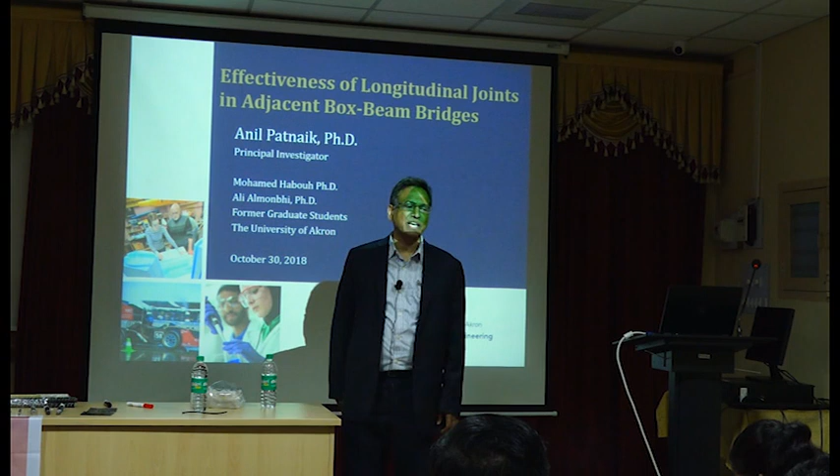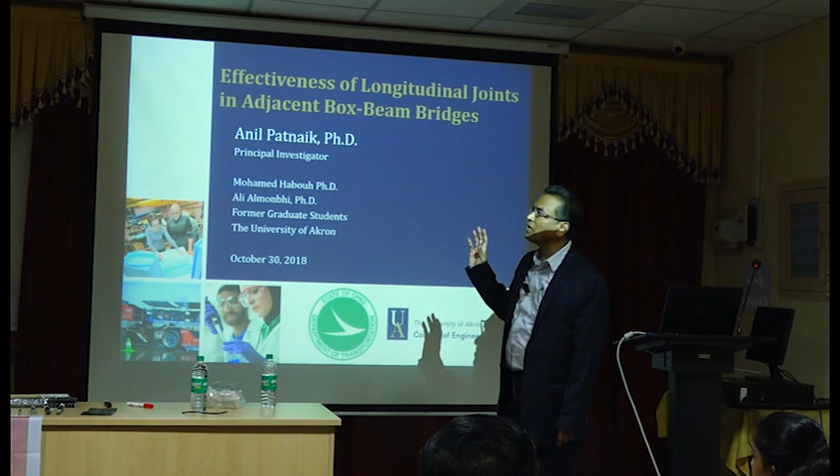These two co-authors are my students who finished PhDs on this project. So we are trying to find out, this research is on the effectiveness of longitudinal joints in adjacent box beams.

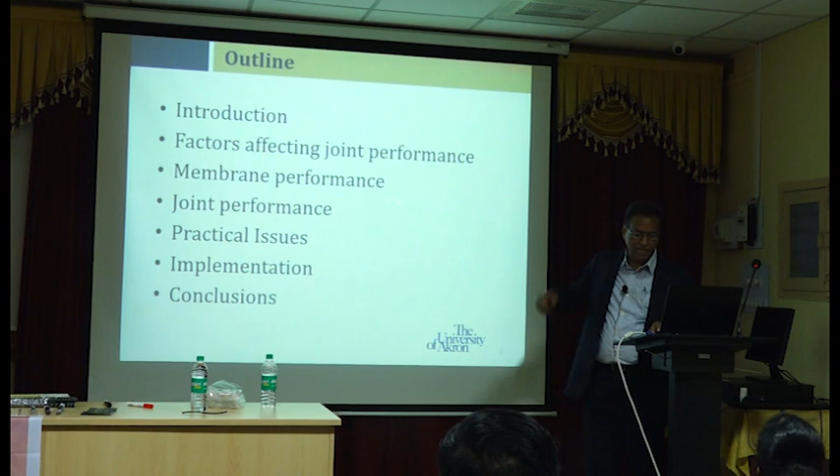I'll go over many things, or at least I will go over a few things and skip a few things. But what's a box beam bridge?

In the US, there are some standard spans. If you have two highways, one on this side, one on this side, with a little divider, the span is about 50-60 feet, which divided by 3 is about 20 meters. So 18 to 20 meters is a very standard bridge span.

Width is always about 12 meters. Almost always, you'll see 12 meters width in many cases.

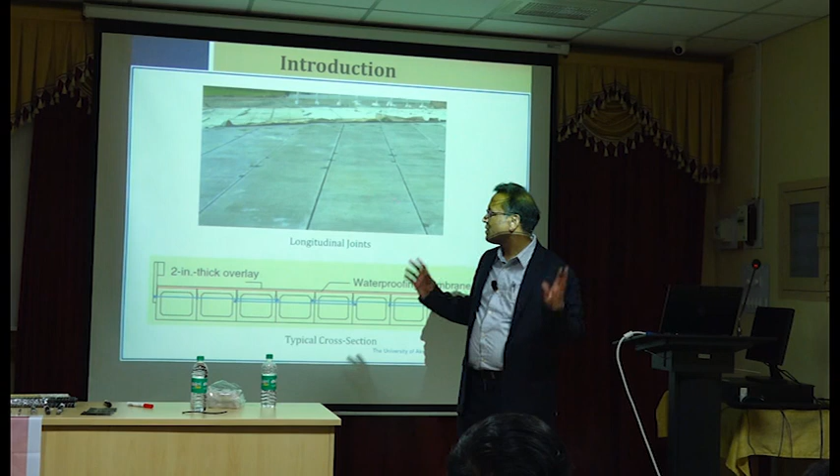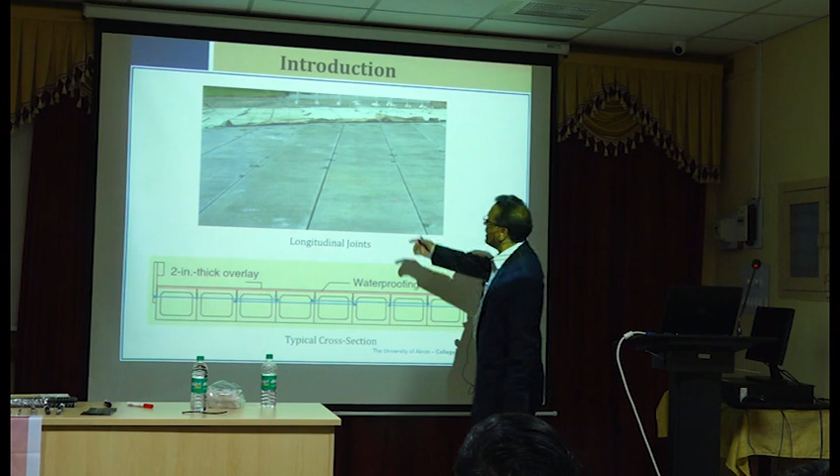So what they do is make precast box beams just like this. They make hundreds of them, bring them to the site, put them all together, and tie them 3 beams at a time. So they're all tied together, and there is a joint here.

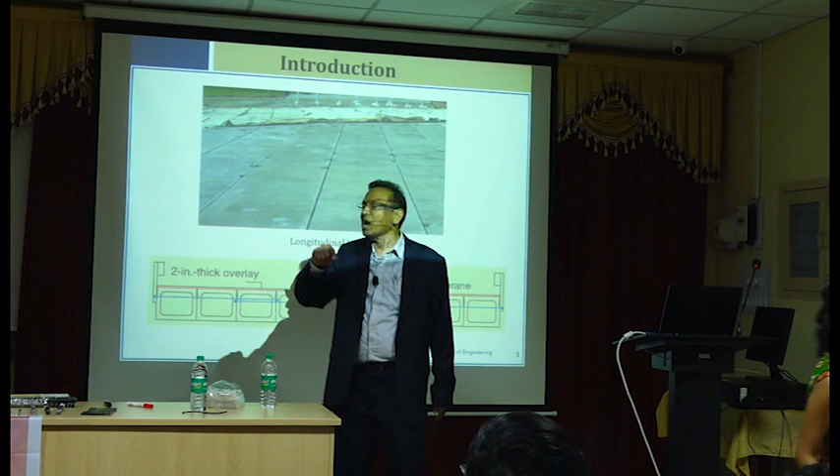So at each location there will be an annular space, and in that annular space they fill just grout. If you put grout, then the assumption is they will all work together.

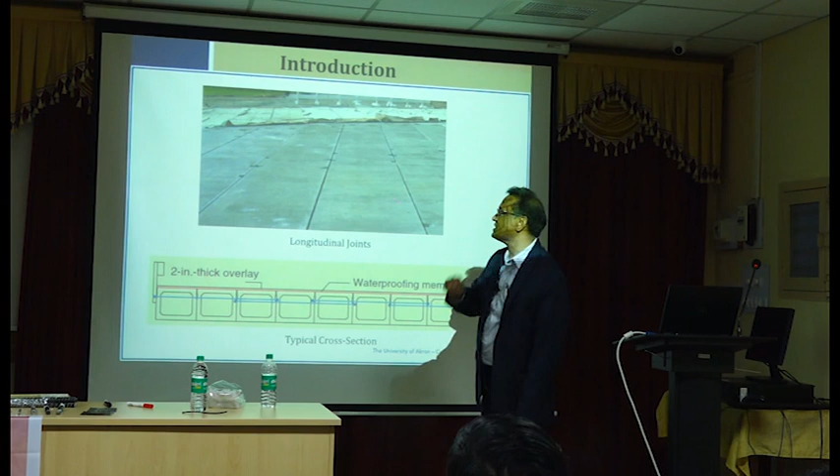So those of you familiar with highway bridge design, our standard width of an axle is about 6 feet. 6 feet is about 2 meters, actually less than 2 meters. So these beams are smaller than 2 meters.

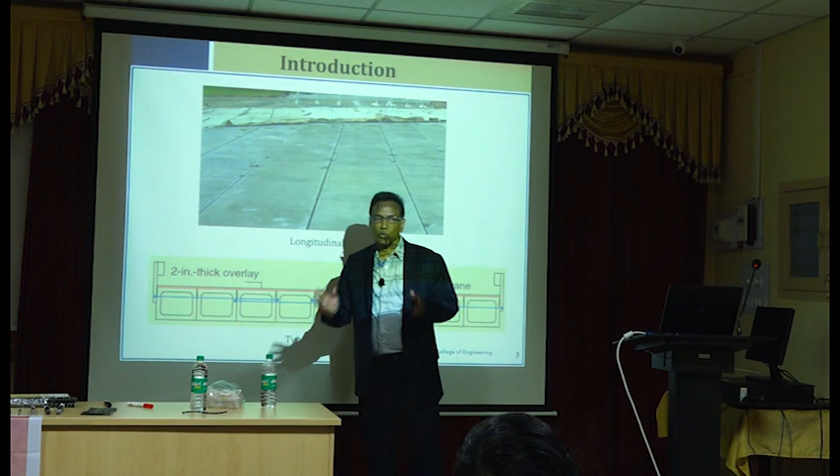So if all these beams are working together, you can assume some kind of load transfer over more than one box beam. That's the assumption, and that's the whole point of making this work together. If that happens, it's great. If it doesn't, then your boxes will be stressed too much. If you design for a smaller load assuming perfect interaction between adjacent beams, then it will become unsafe.

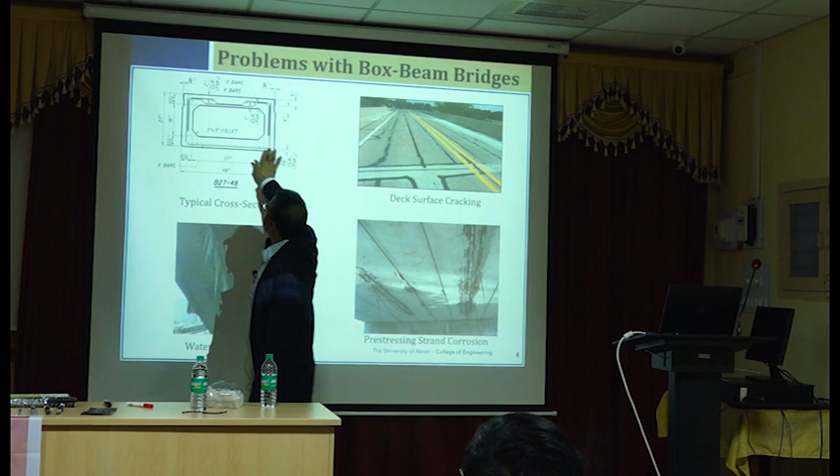So the typical details look something like this. You have a lot of strands, mostly pre-stressed strands, not post-tension but pre-tensioned prestressing strands. And they have very long casting beds.

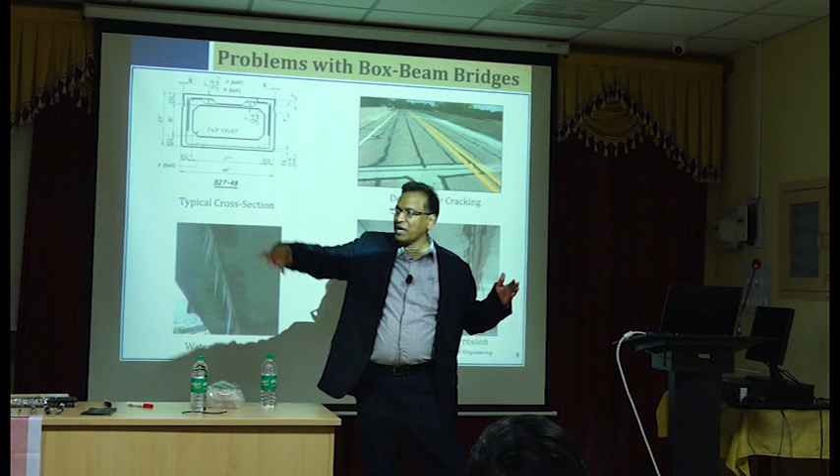Did any of you go to a pre-casting plant yet? If you have, or if you haven't, just go to something nearby. Generally they have 100 to 150 meter long beds, and they make these box beams in one long stretch.

So each bed you can make 10 beams, maybe 8 beams, depending on the span, and then they cut the strand in between to make smaller beams.

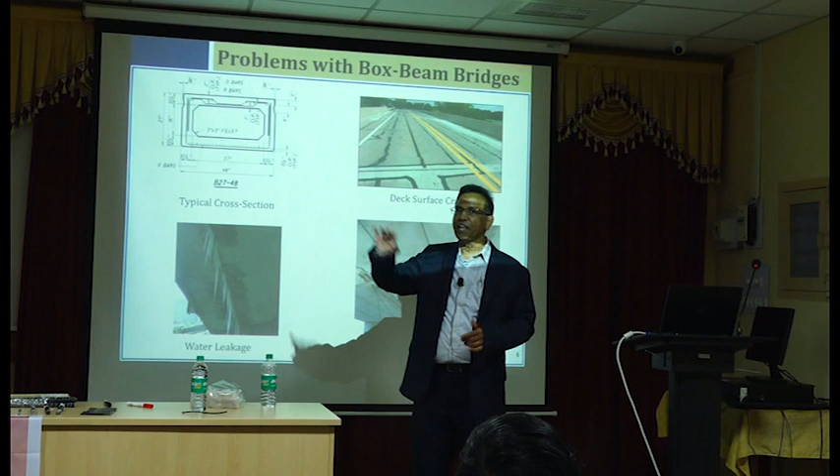In one day they can make 20 beams. That's how fast it is done. You place the concrete, let it set, then cut the strands and remove it from the formwork. You remove that in less than 15 hours, 12-15 hours, and then they make preparation for the next set of beams. So it's a very fast process.

Each beam is less than $20,000, very little money. So these beams are very inexpensive to make.

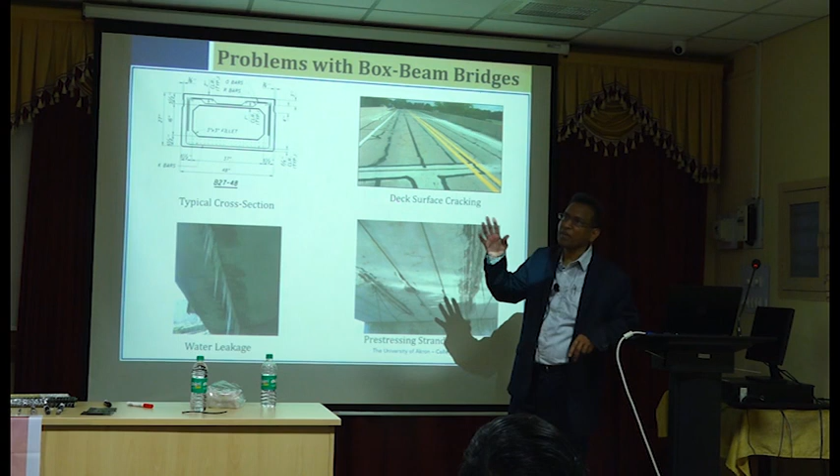So there are at least 20,000 of this kind of beams in just one state. This kind of bridges, each bridge will have 8 or 10 boxes. So it's a very common thing.

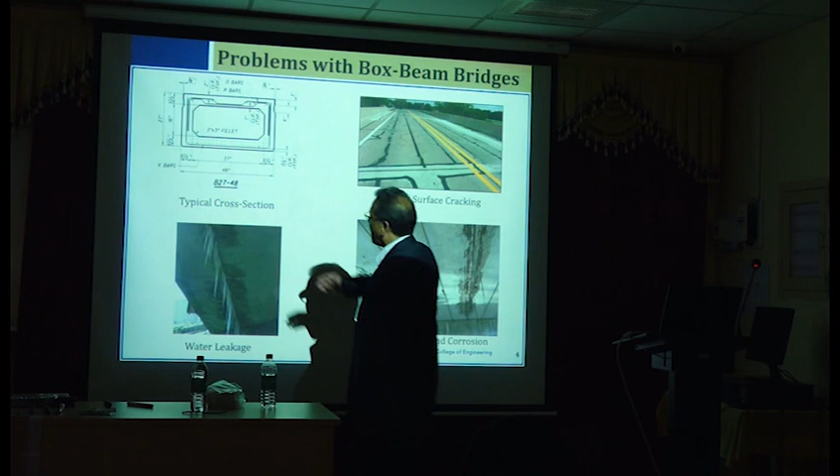But the whole problem is these joints tend to leak. You can see how these icicles are formed. Can you turn off the front light just for 1 minute? Yeah, just for 1 minute. So you can see how the water seeps through here, and because it's very cold, it becomes icicles like that.

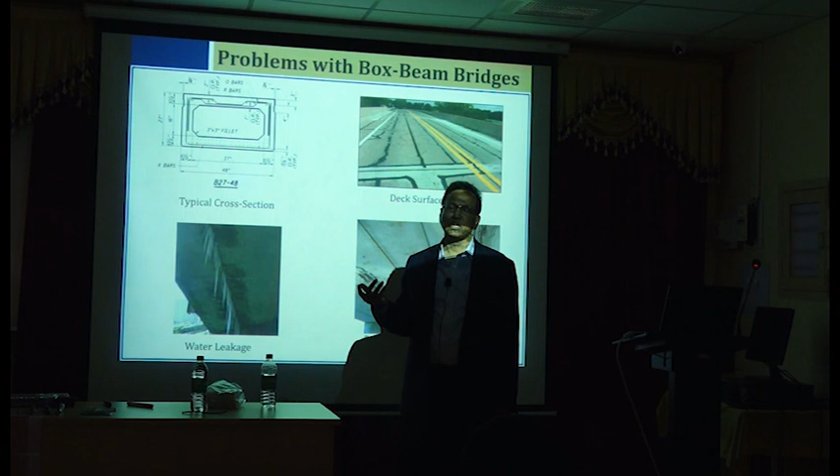So that's ice. And to keep the ice from becoming hard, they spray a lot of salt chemicals. Nowadays the people who maintain the roads don't care about structural performance, so they put very aggressive salts, a 30% salt solution, which is like a very strong brine solution.

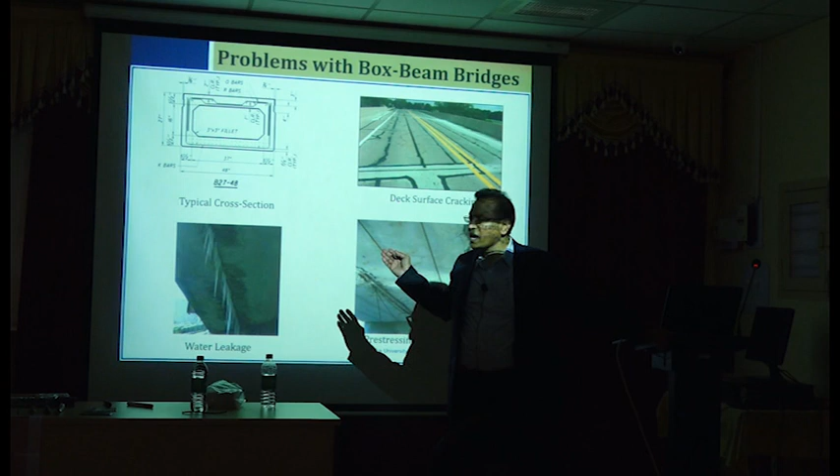They spray that high concentration salt solution on it, and that's what causes corrosion. All these strands break, not all, but many of them, and they start falling down onto the road below the bridge. So it's a real problem.

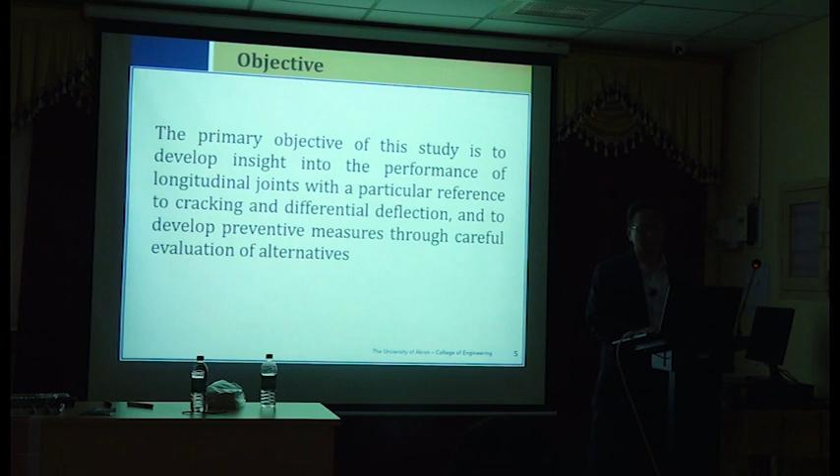In this project, we were given the task to improve the performance of this kind of box beams. So we looked at three aspects: membrane performance. I think I'll go back a minute and explain what it is.

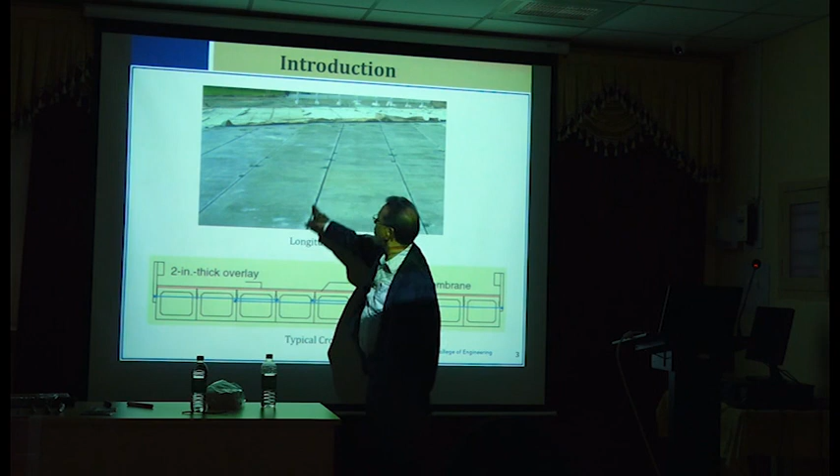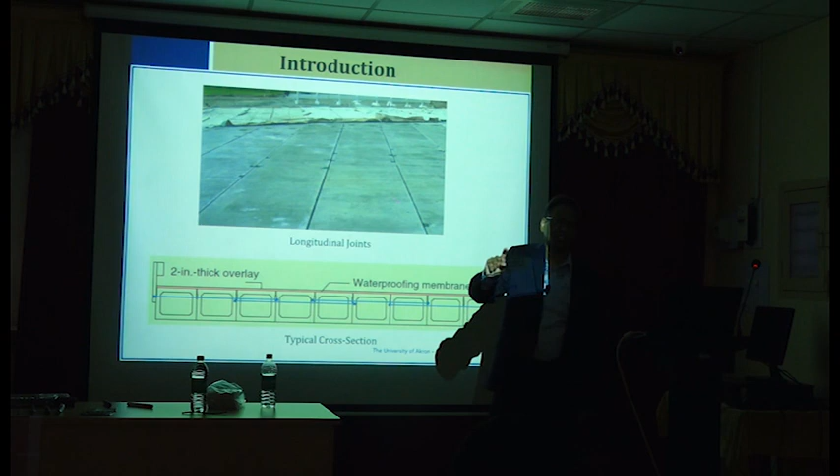So once you place these box beams side by side, you grout the joints, then you put a waterproofing membrane on top, and then on top of that you put a 50 millimeter asphalt wearing course, a 2-inch wearing course. So first you have the box beams, then the membrane, then the asphalt wearing course.

Very quickly you see that within a matter of weeks, these box beams crack at the joint. That's a big problem in many parts of the United States, so they are willing to invest a lot of money to do research, and they asked me to do some work on that to improve the performance.

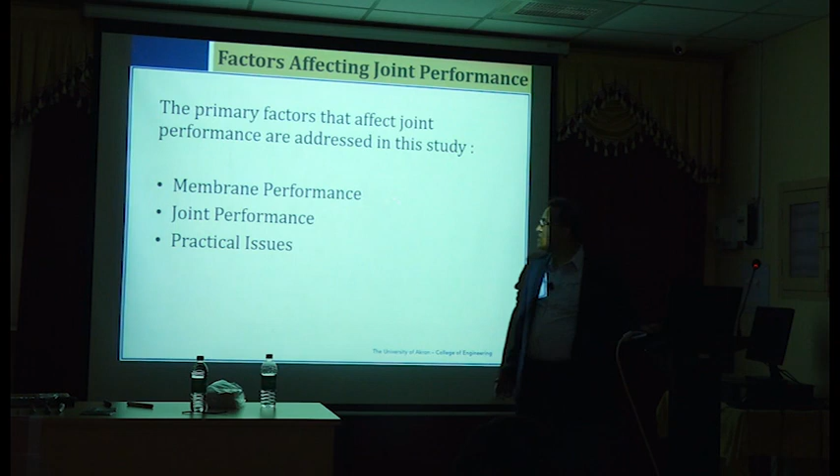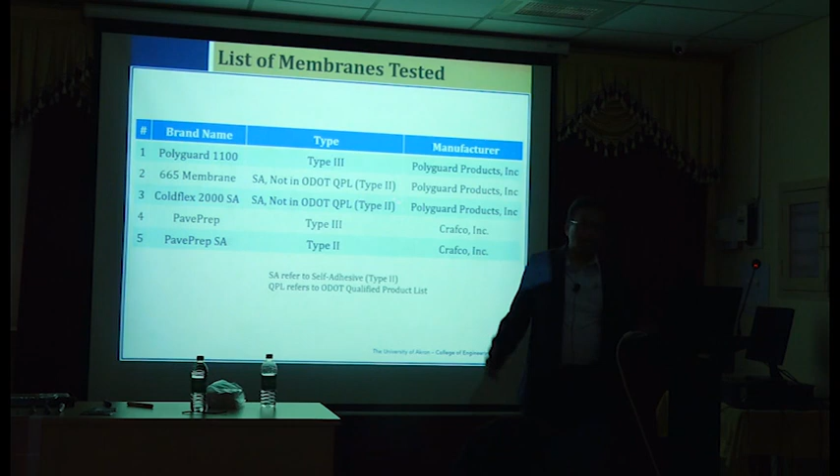So we looked at membrane performance. This may not be very interesting to you, this part. We looked at various different aspects of membranes, we picked a lot of membranes. I'll go fast because we don't have much time. But we did a lot of tensile tests, peel-out tests, shear tests and so on, and then we did waterproofing tests, everything.

What we found was everyone thought the membrane is not working, that's the reason there is leakage in the joints. But we found that the membranes are perfect. They are not really causing any problem in terms of water leakage.

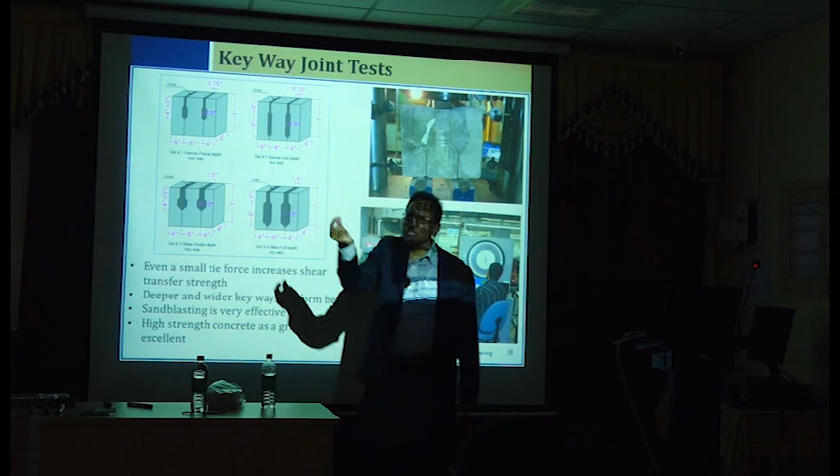Then we started looking at the joints. The joints look something like this. The standard joint is a very small joint, 3/4 of an inch, meaning a 20 millimeter opening. You place your grout through that opening, and there's about a 40 millimeter width below the top surface. So you place your grout through that, and then once you place the grout, you think it's okay, it's working.

And then we tried different types of geometries for the keyway. Keyway means the joint geometry.

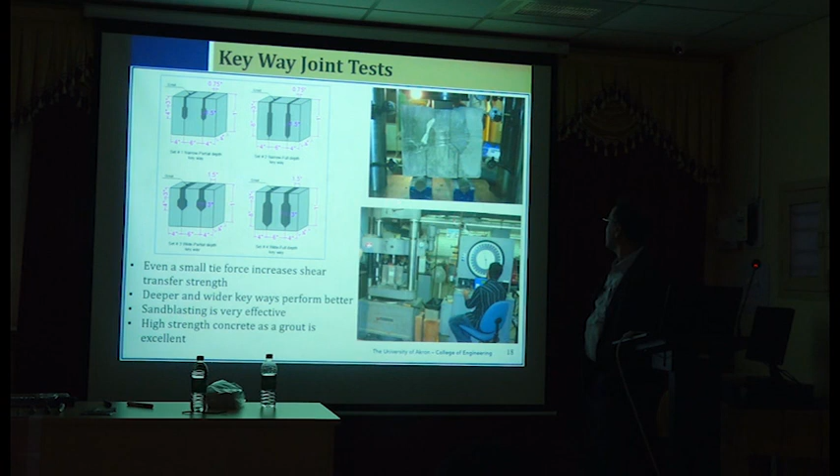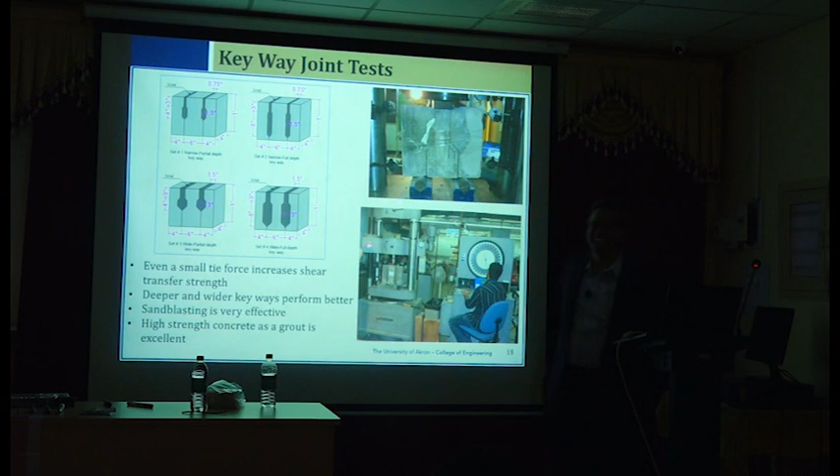I think this is one of our students who Jagdish knows. I think that's Srikant, that's Srikant. So tell him we are all in the class, they looked at your picture, and just tell him he looks very handsome. He is handsome anyway.

So we have so many different kinds. Then we did a lot of beams with very long spans, and we actually tested these joints.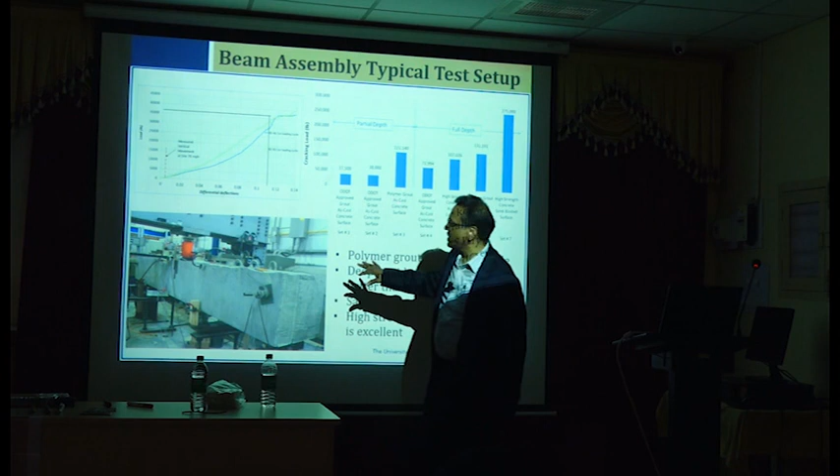I will go a little bit quick because that's what we will need to finish these presentations within the 2 hour time slot. So we tested about 25 feet, let's say about... up to 10 meter length beams we were able to test, and we tested almost all of those at full scale.

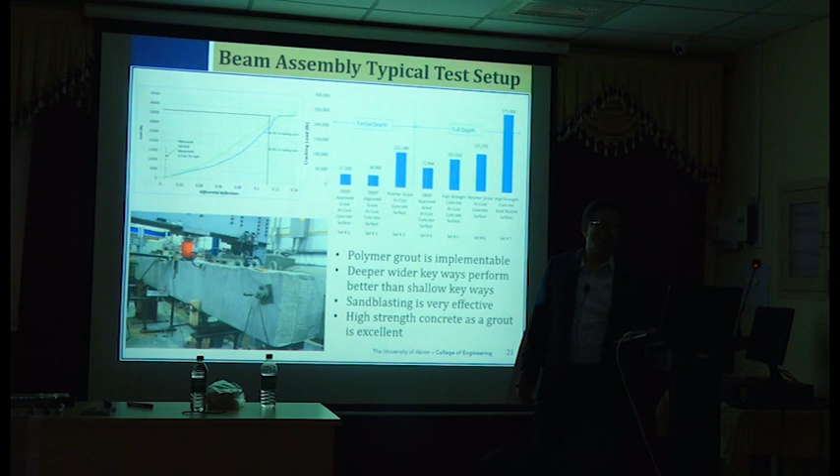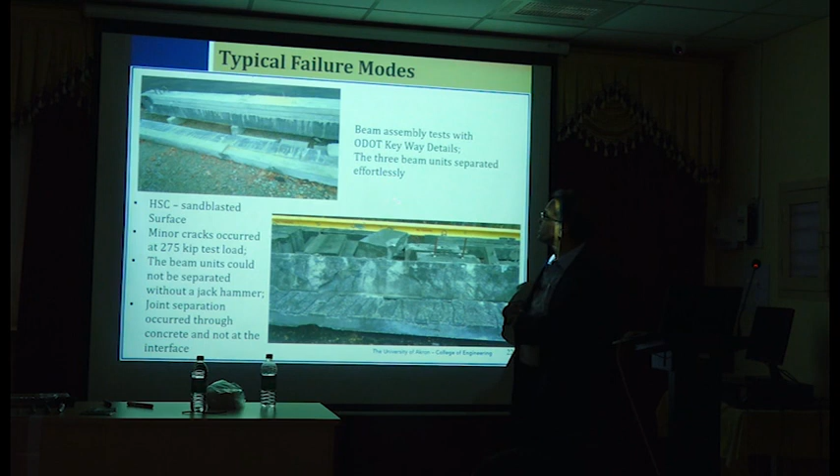We tried many different grouts, and then we came up with a special grout mix design which improved the strength by a factor of 5 or 6, which was very good.

Then we did a lot of finite element analysis, Abaqus analysis, and we were able to actually find out the stresses at the joint, and then we tried to improve the joint performance by making the joint deeper. By making the joint deeper, the stresses are far lower than what we were expecting at this time with shorter height.

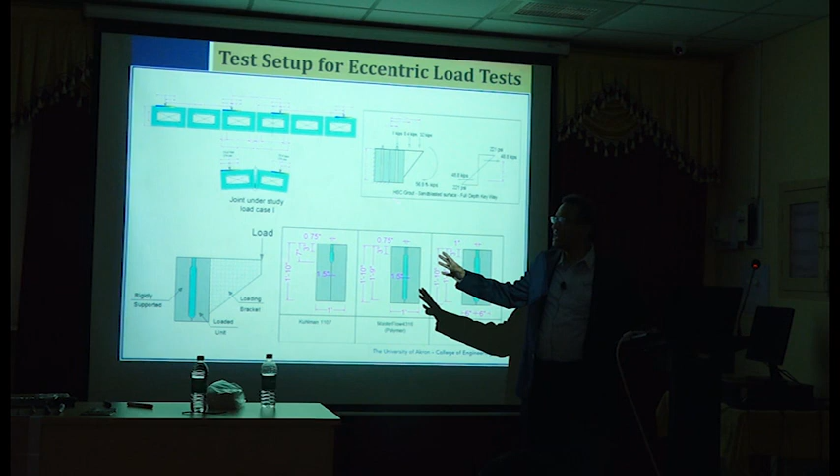So we did many different types of analysis, and once you do the analysis, you want to actually simulate the analysis results in the laboratory tests. So that's what we did.

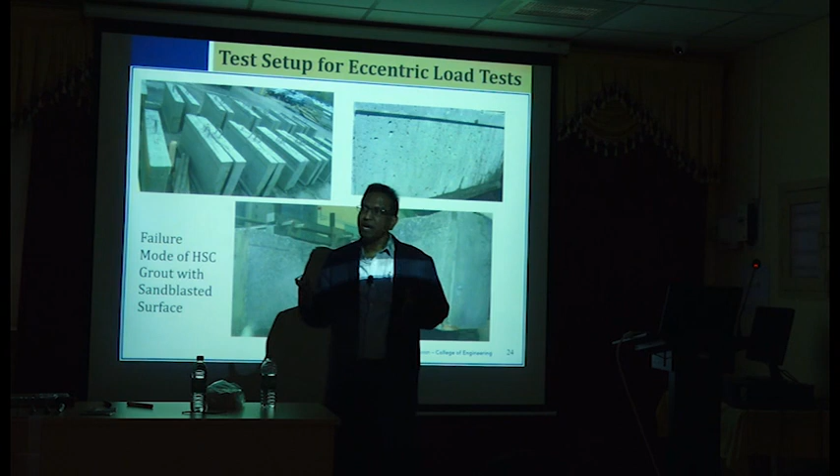Hundreds, my students, they like to do hundreds of, or not like to do, but they do hundreds of tests to get proper standard deviation and to get reliable results. It's lots and lots of work.

In American universities, we don't have technicians, so each of my students is a technician. I am a technician, everybody is a technician, you do your own thing. All the casting, my students do it, the testing, they do it. But it's somewhat advantageous because you have very good cranes, we pick them up, place them, everything. One person can do everything.

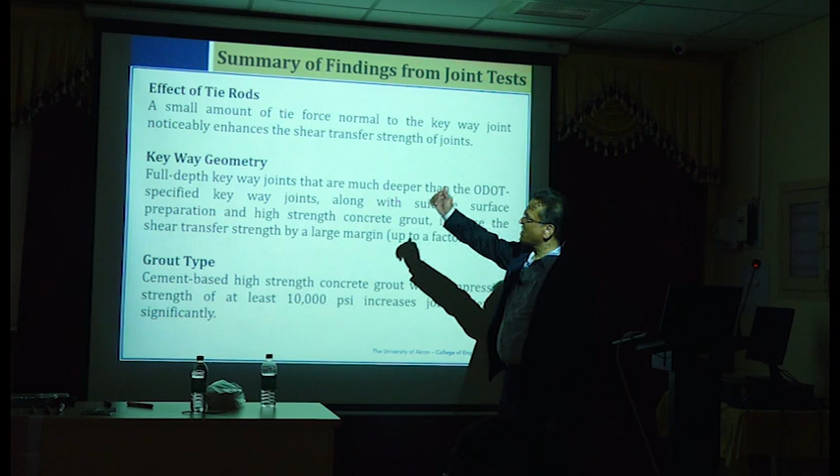So that way we improved the joint condition. We looked at the tie rod effectiveness, keyway geometry, grout type. I'm not going through all the details. Joint surface preparation, sandblasted joint surface preparation, and as-cast surface. And then we looked at the current specifications and suggested some suitable modifications. So that's the sequence of all these tasks.

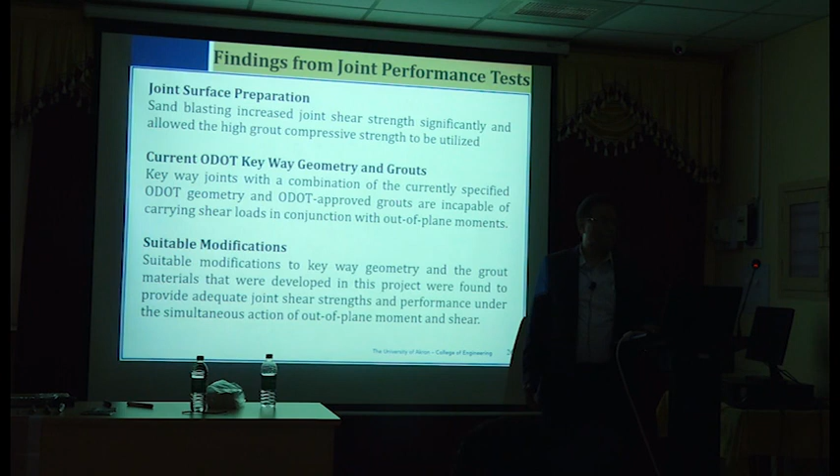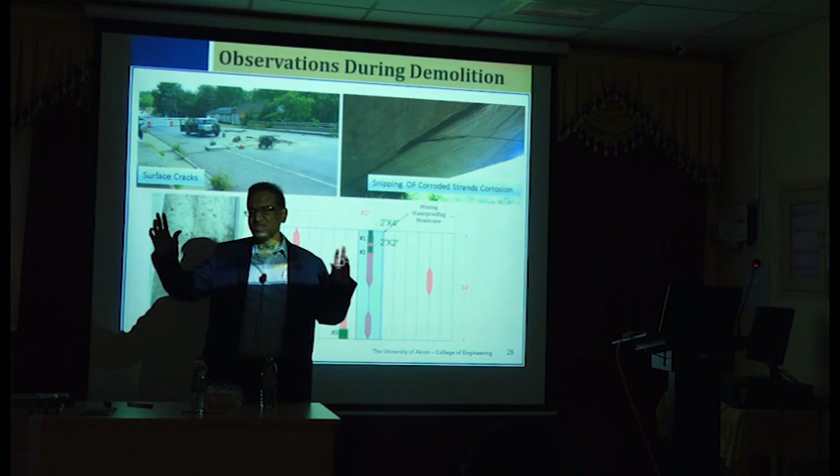So then we actually did this because they were tearing down some bridges, as they're too old. But many times I feel so bad that the bridges they are tearing down there, if I could ship them to India, they would be some of the best bridges in the country. No, I'm not joking, I sincerely feel very sad when they are tearing down such beautiful bridges, because they just don't want to deal with maintenance. A little bit of maintenance, you can actually use that bridge for the next 30 years.

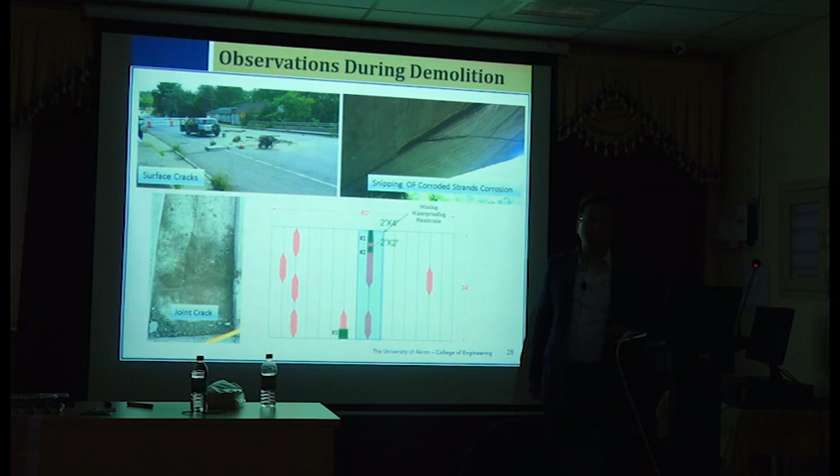My student cut some openings and removed the membrane. After 30 years of service, we found the membranes were really in bad shape. So we had some specification changes to reflect that kind of poor performance of membranes.

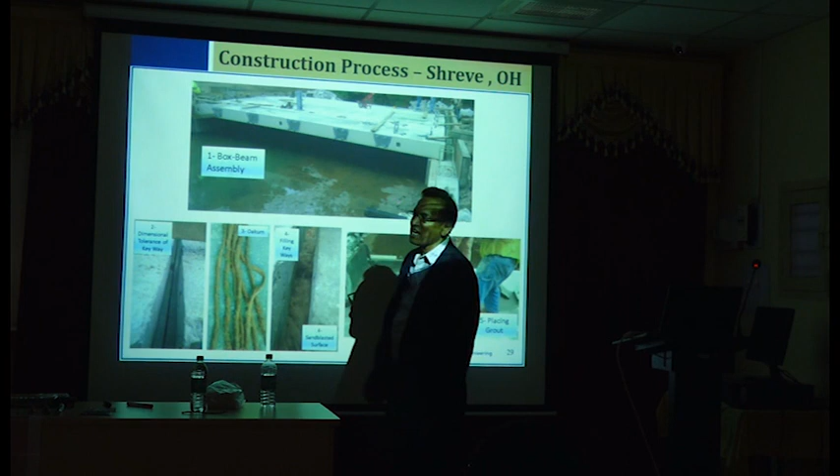We also looked at the construction process. My students went quietly to the construction site - you won't see many people at a construction site in the US, just 2, 3 or 4 people, because everything is lifted with cranes. They told the workers, we don't know anything about box beams, will you please teach us how to do it. The workers were so sincere, they believed it, and kept explaining everything they do, but many things they do are not really the right things to do. They'd say, okay, we do like this. Quietly my students recorded everything, then said thank you, goodbye.

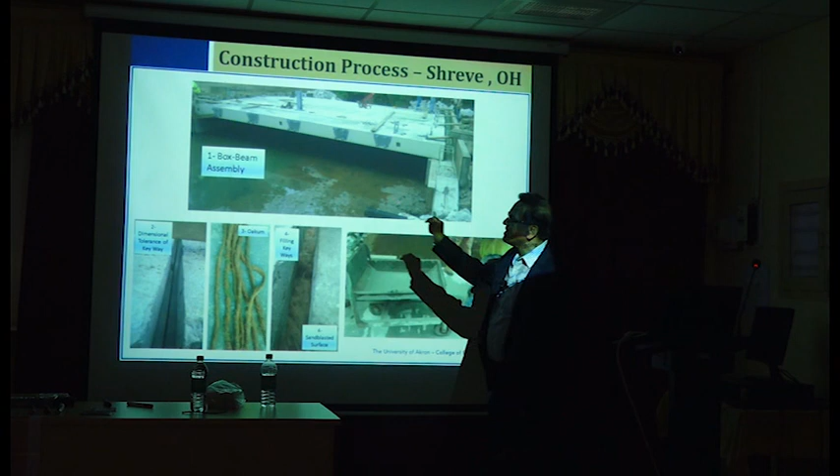In our report we wrote that some of the things practiced on the construction site are not very good. They make the grout and place it in the joint. At the bottom they seal it with some kind of oakum, like a jute rope - similar but not exactly that. They put it there and seal it. But they don't care because first of all they cannot see - the opening is so small you cannot really see. They just put it inside at the joint, and that's all.

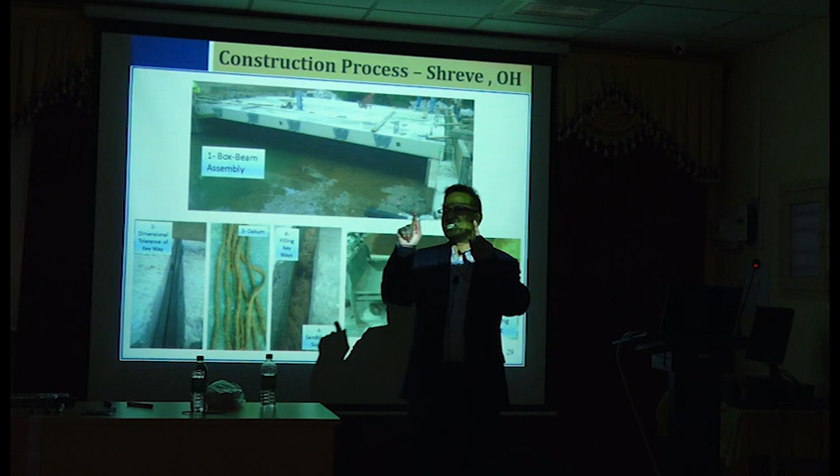They place the grout - can you tell me where the grout is going? This is watery, very, very watery. Those are all ready-mixed grouts. The instructions say just add water, so that's what they do - literally. They pour water, keep pouring until it becomes really watery, then place it in the joint. Can you tell where that grout is going? Right here - it's all green, you can see that. That's an environmental disaster.

If the inspectors come, they will simply fine them tens of thousands of dollars. But anyway, that's what they do.

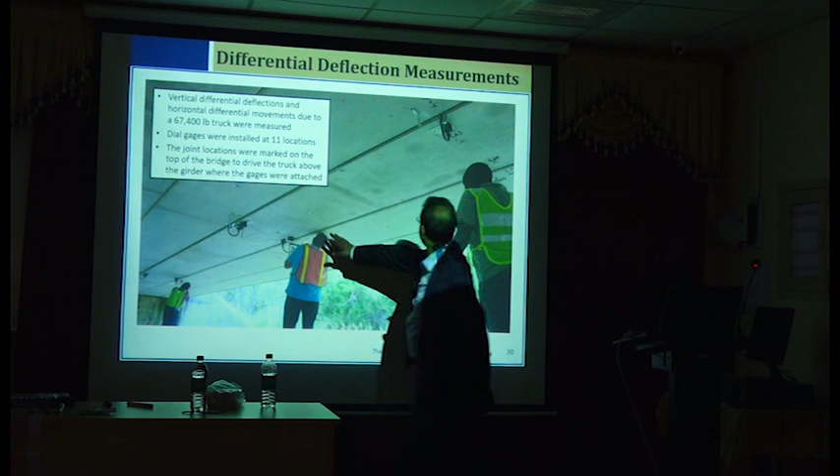We also had a lot of field measurements. Our students - Habu, Abdisa, probably Shrikant, Jagdish - we saw you so many times in the pictures.

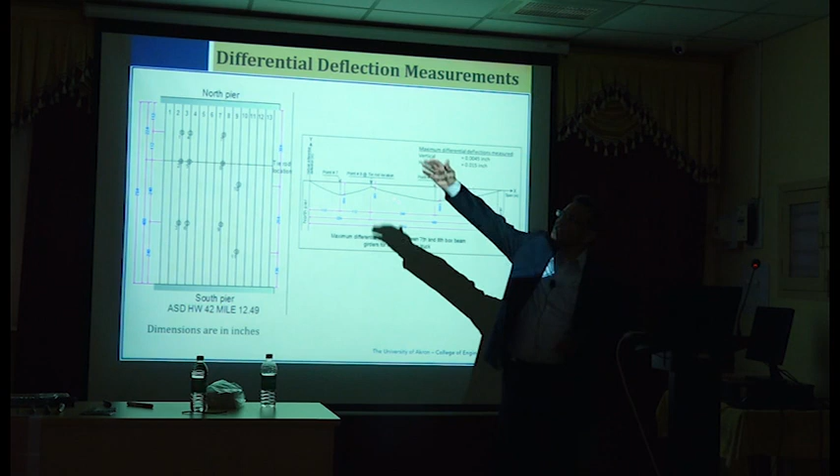We measured all the deflections and did our analysis. My students did the analysis - they compared the actual deflections with measured deflections, and the deflections are very, very small, about 0.01 inch, which is less than 0.3 millimeters. So for a 60 foot span, you get very small deflections, meaning the joint is not really seeing too much differential deflection.

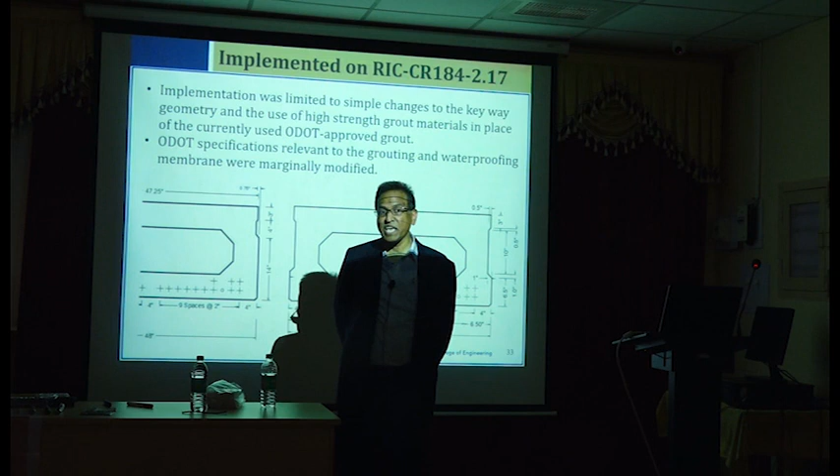Then we changed the specifications. We had to verify those changes - they won't let us use that as a standard until we validate it with full scale validation. So we changed the joint type, the only thing they would let us change - the joint shape, the surface shape. This was the original shape on the surface of the box beam, and we made it much deeper, much wider, and gave them the specification for grout material.

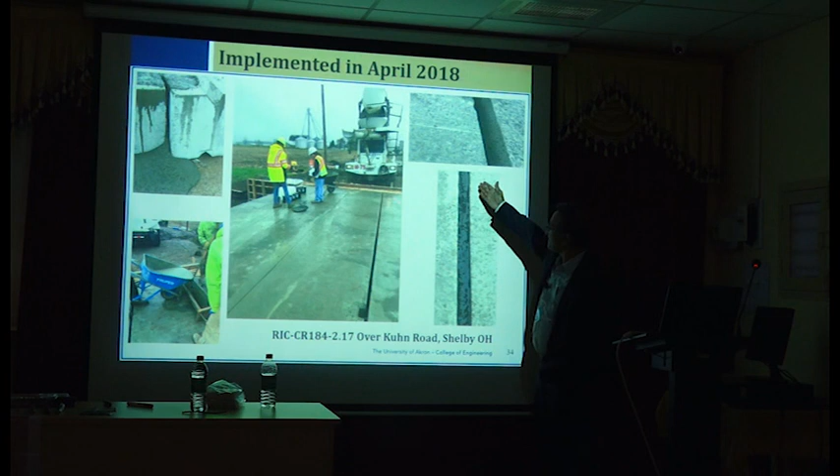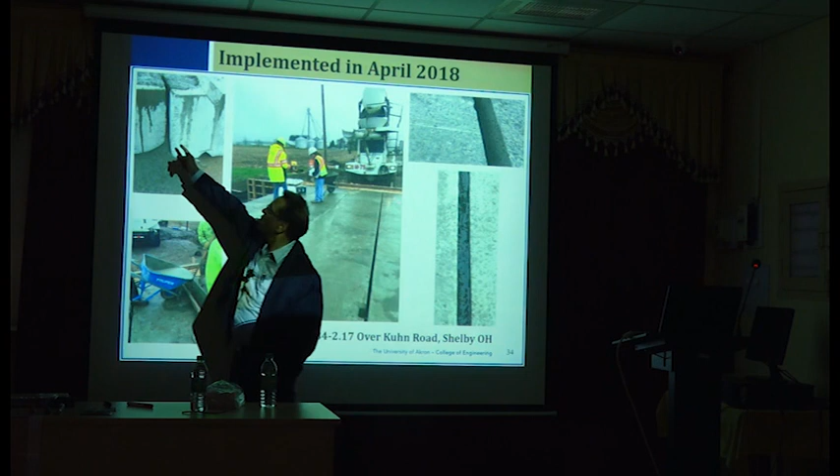It worked very good, we actually implemented that. We're at a bridge site where these are the joints. They placed the grout - it nicely filled the keyway and it was flowing really well. Before placing it in the joints, we actually tried it in the precasting yard with two blocks of concrete with the exact same width as what we specify in the drawings. You can see the grout flowing so well, all the way down.

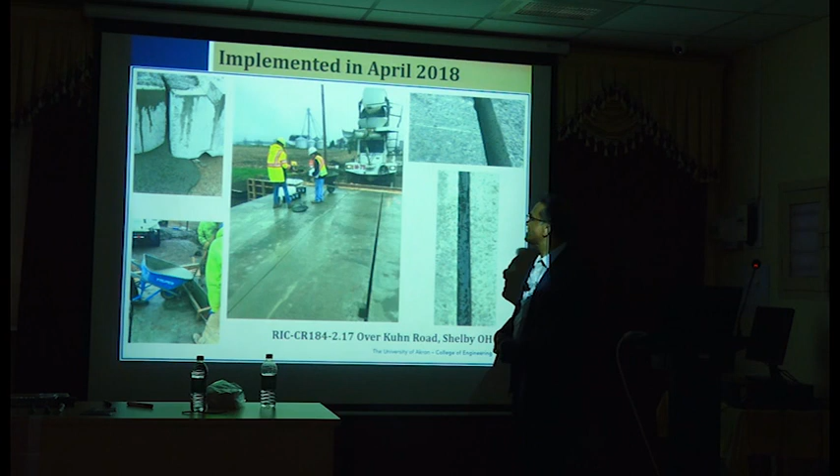That's the miracle of modern day admixtures. You add admixtures with proper dosages and you get something just like water, but at the same time very, very strong - the strength is not lost at all. That's the advantage of admixtures. So everything looked good, then they placed the asphalt topping, and it was perfect, no cracks.

So they are going to implement this. After I go back in a week or two, we have a big meeting with all the precast industry guys, so I'm going to convince them to use these details.

They are a little reluctant because they have to change the formwork. The formworks are all steel, by the way, so they make it once and use it for 20 years. They don't want to make changes because it costs money. So I'm going together with the Ohio Department of Transportation, and together we'll offer them a deal: we'll pay you this much money to change the formwork, and then they may agree to change everything.

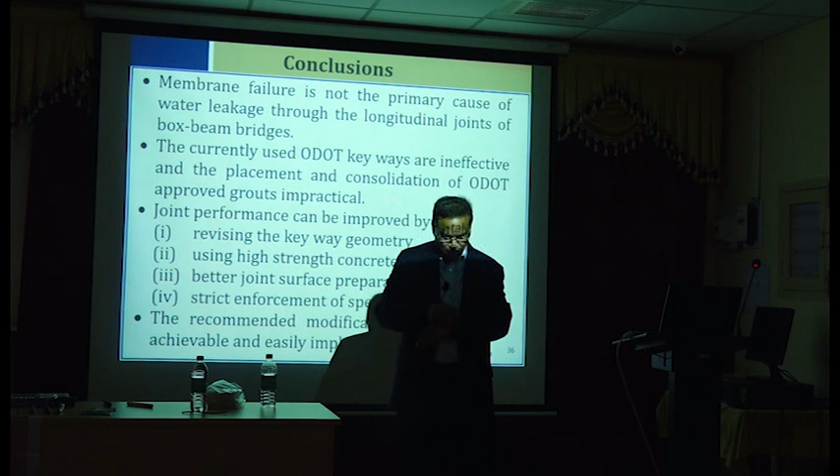Based on what I've presented in less than 15 minutes, this represents 3 years of work and 2 PhDs, a lot of hard work. They worked so hard, day and night. When Jagdish wanted to come for his PhD with me, I scared him and said, this is what you are going to do, are you ready? If you're not ready, don't come.

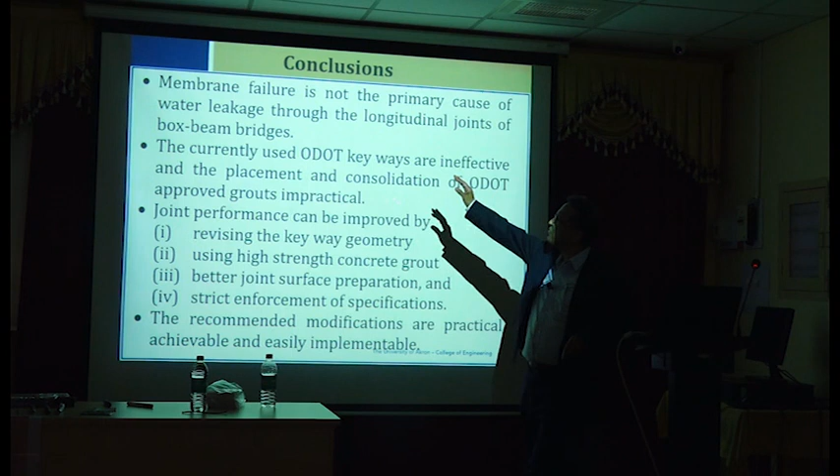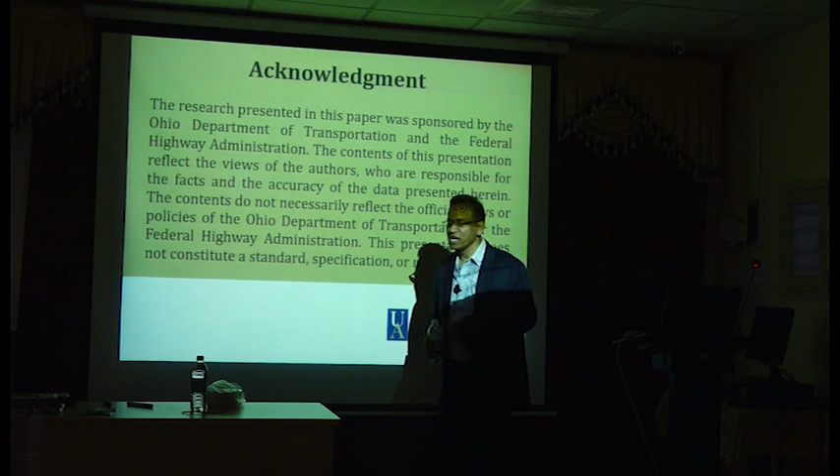After a lot of hard work, we finally found that membrane failure is not the problem, and we made changes to the current specifications. We implemented it, showed that it works, and it's a good solution. Hopefully we'll implement it at a large scale. The specification for the department will change based on this work, and we're very proud of the results. Okay, any questions?

Will all the beams act independently? No. They are independent up to the point where you put the ties and grout it. Once you grout it, they're supposed to work together, but they don't, because the load has to be transferred from one beam to another. There should be shear transfer. Right, absolutely, you said the right thing.

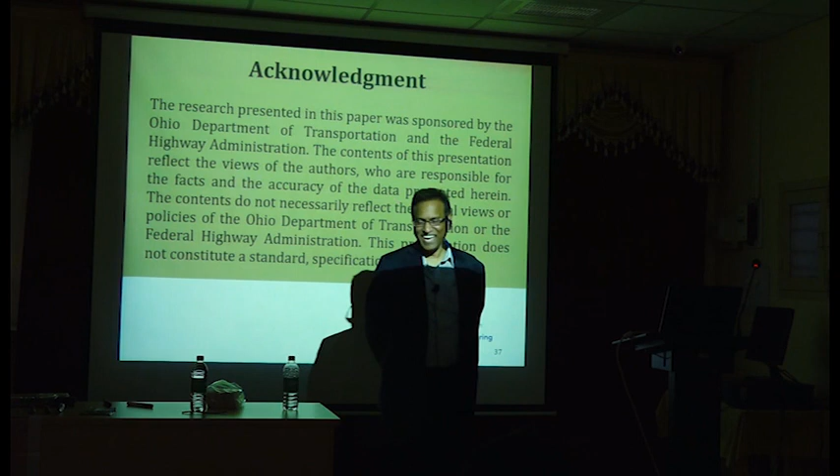Either dowels or the surfaces should be roughened. I agree, you're saying exactly what I agree with, that's right, you are right. With a small keyway of smaller depth, the shear connection is only over a small depth through the grout, so it wasn't working. In fact, the grout wasn't even filling the void. With the changed details, it's perfect now.

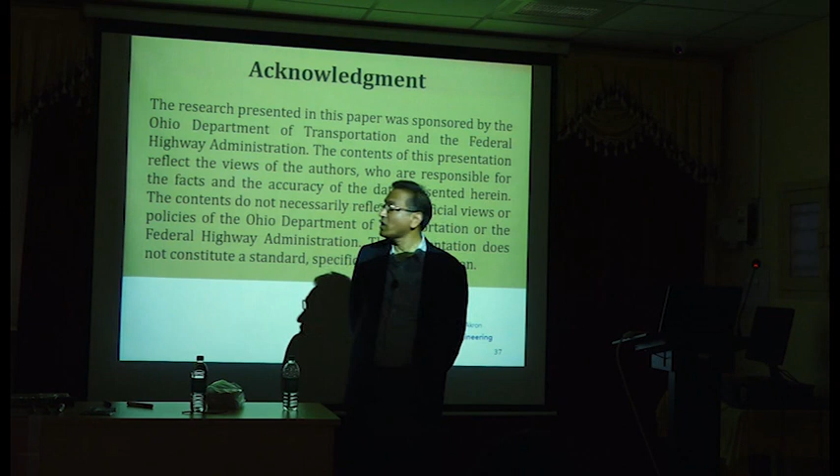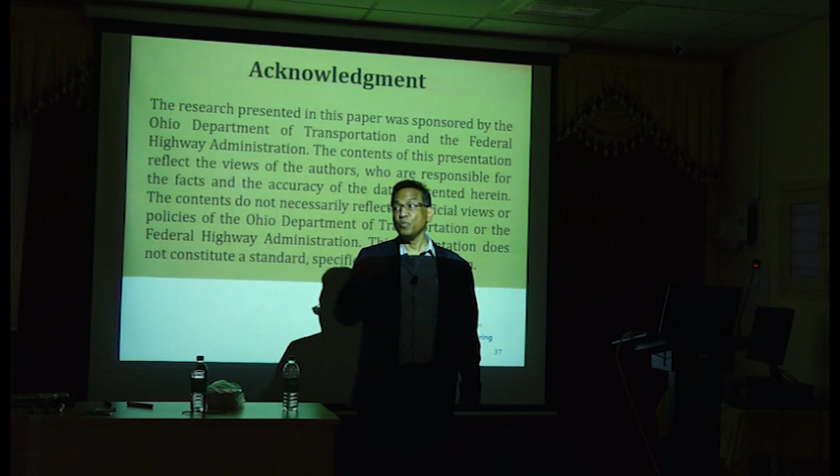Oh no, everything costs money. You change any design, and even changing the keyway geometry is so hard because the contractor is so geared up to do things a certain way. They've been doing this forever. If you make changes, they'll mess it up and then blame us, and contractually we'll be liable. They can sue us for millions of dollars. That's the problem in the US, everything gets litigated. Legal issues and lawsuits are a problem.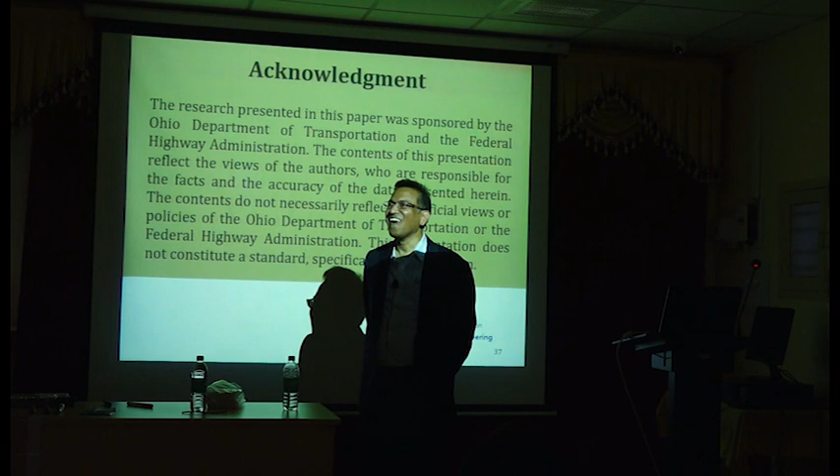Can we reduce leakage and increase the strength of the bridge by doing post-tensioning in the transverse direction? Oh yeah, post-tensioning, we've done that too in one of the bridges. I wasn't personally involved, but my collaborators in the department did that. They used carbon fiber cables for post-tensioning. The ones I showed you here are from that project, so they used this carbon fiber.

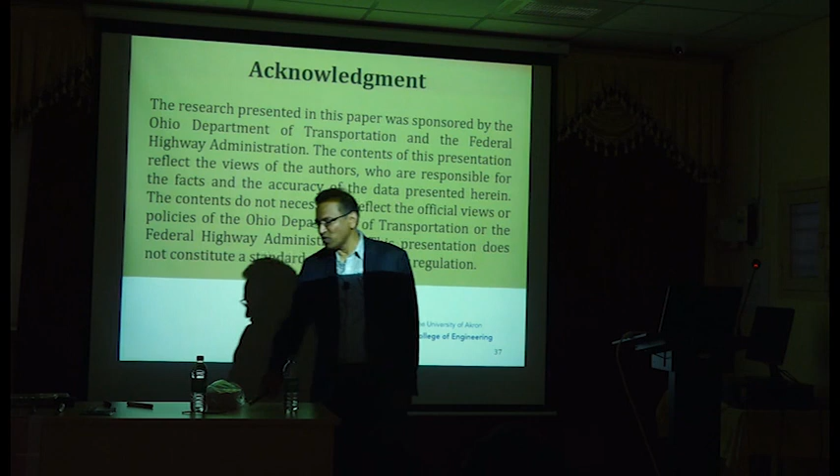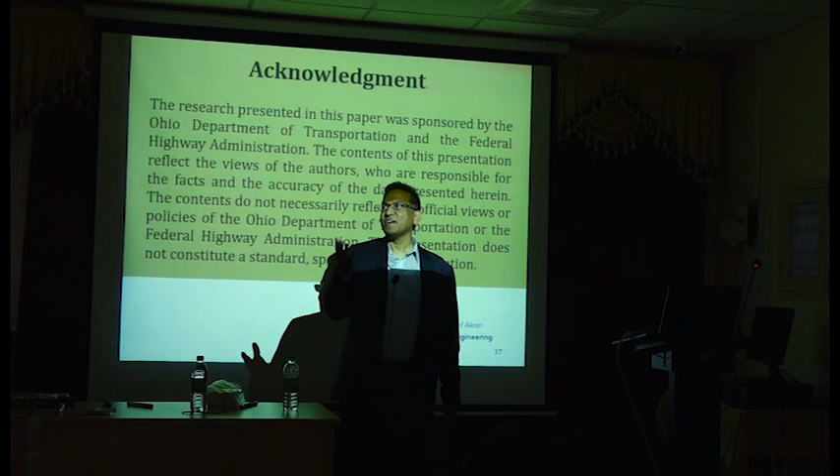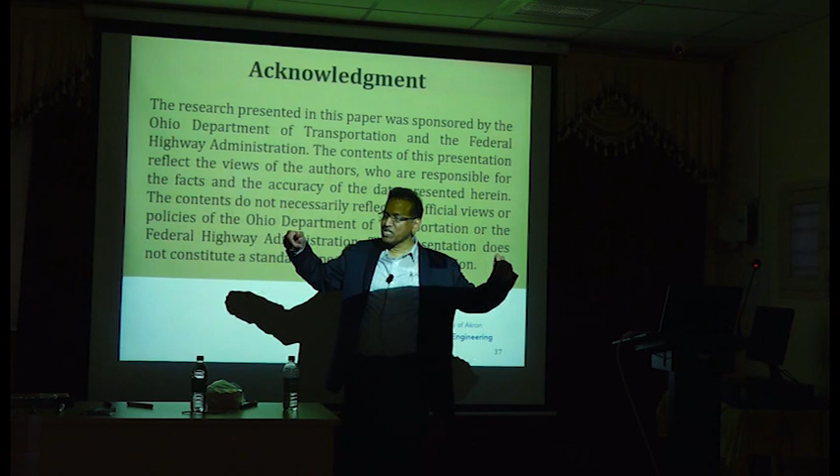But there's a big difference. When those beams are cast in the precasting yard, they have the formwork and everything geared up to make those kinds of beams, 15 to 20 beams in a day, no problem. So imagine the turnover, meaning how quickly they're doing it, and how cheap or cost-effective it is to make those beams. But if you're doing cables and post-tensioning at the site, at that height, that's going to be very expensive.

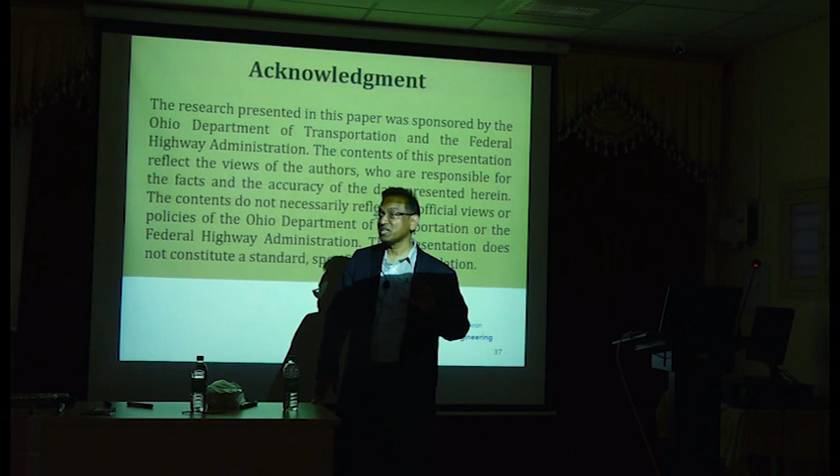That's why you can do post-tensioning, but it costs a lot of money. Some of the departments are using only that kind of post-tensioning, not just tie rods. Anything else?

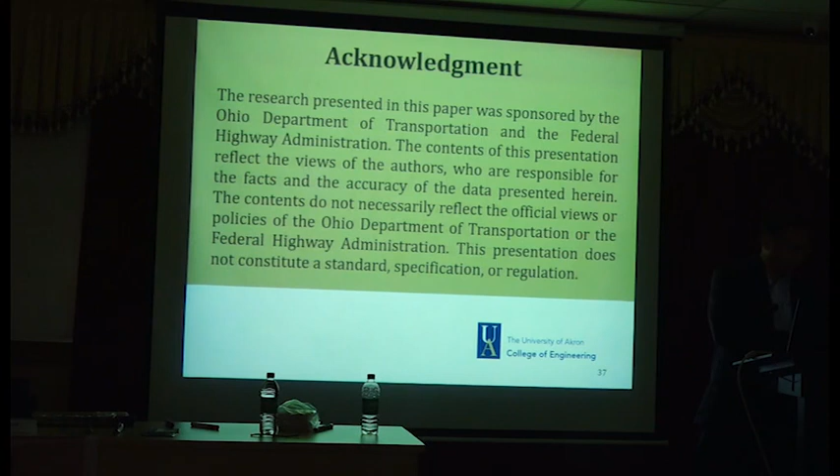Okay, so the next presentation I'm going to show you is on bridge decks, just slab bridges.

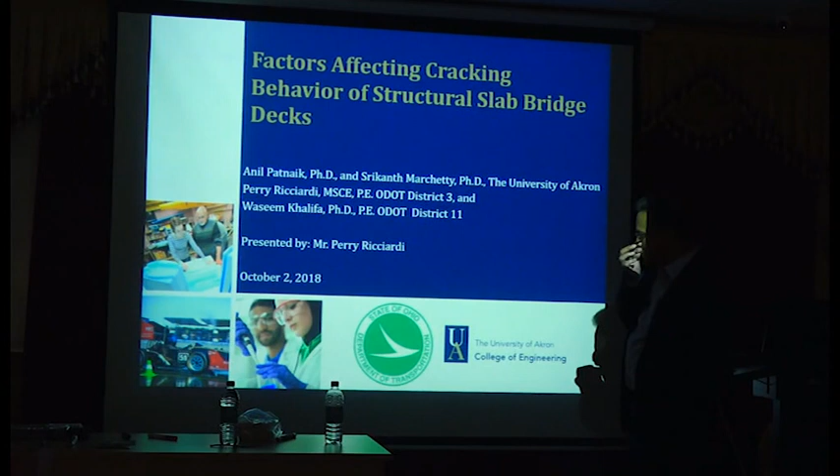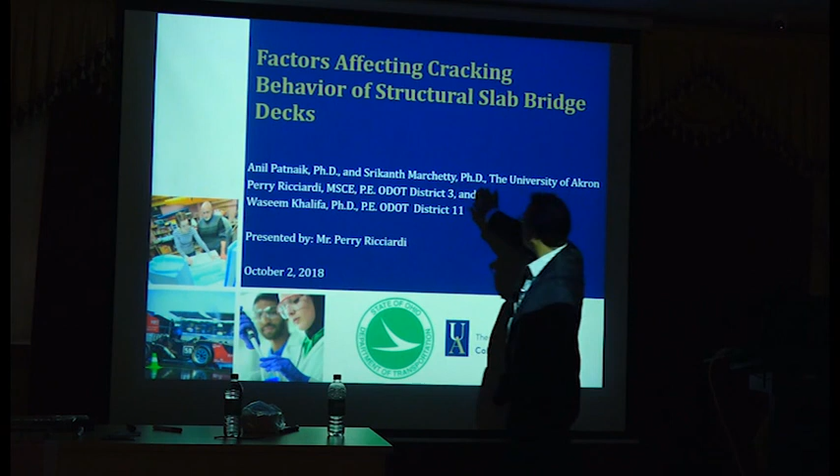Cracking is a big problem for structural slab bridges, so this is another project where we looked at reducing the crack widths and the extent of cracking. This is my student Srikanth Marchetty, who finished his PhD and is now working in Hyderabad as a faculty member in one of the colleges there. He did 100% of the work shown in this presentation.

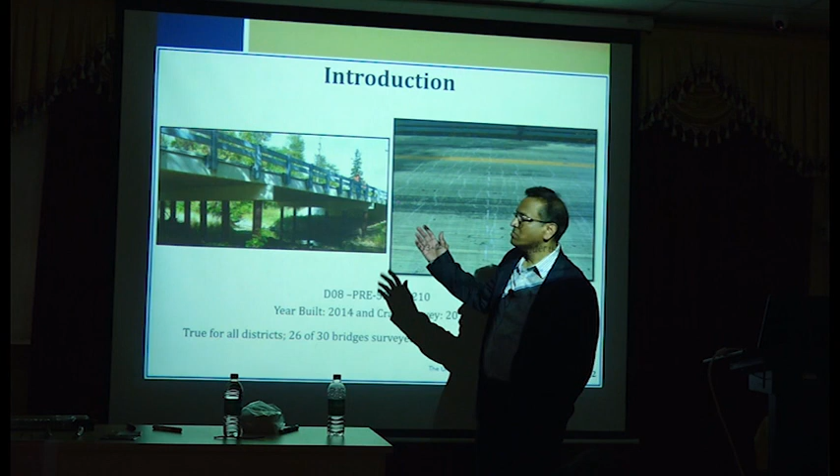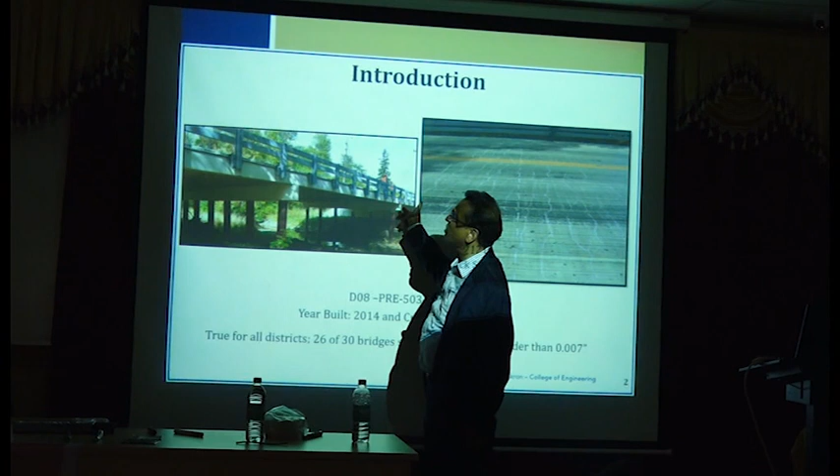In addition, if you have a small stream, you typically have this kind of bridge with 3 spans. You can't see the abutments here, but there are 2 piers with pier caps supporting it, and one abutment on each end. This is a full-depth reinforced concrete bridge deck, so you have 3 spans, and 2 of the supports are continuous.